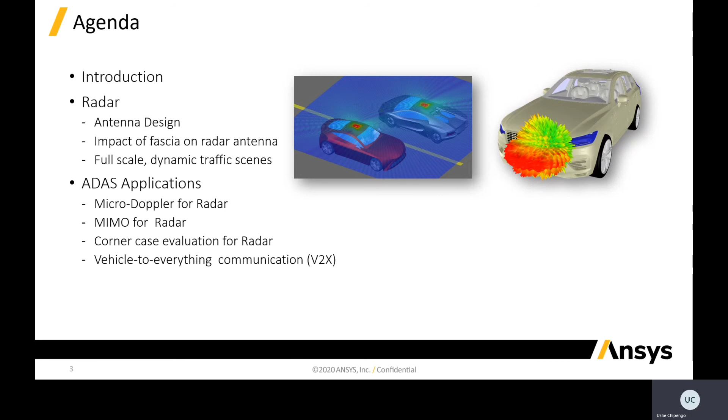In today's presentation, we will be showing how Ansys HFSS can be used in the design and optimization of automotive radar antennas. Using HFSS, we will demonstrate how we can evaluate the impact of packaging and electrically large platforms on the radiation performance of radar antennas. We will also show how full-scale dynamic traffic scenes can be created to obtain full physics synthetic radar returns for range, Doppler, and angle of arrival processing.

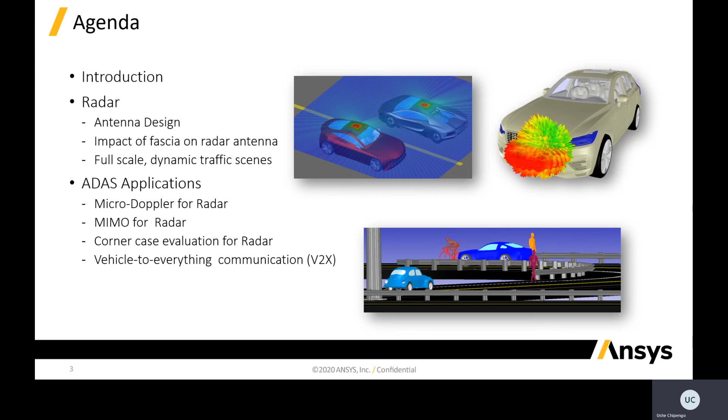Now, using this workflow as a foundation, we will show how HFSS can be used for Micro-Doppler and direction of arrival analysis using MIMO antennas in automotive radar. We will demonstrate how using simulation, we can evaluate the response of automotive radar systems in corner cases. Finally, we will show how the above-mentioned workflow can also be adopted to test vehicle-to-everything or V2X communication links.

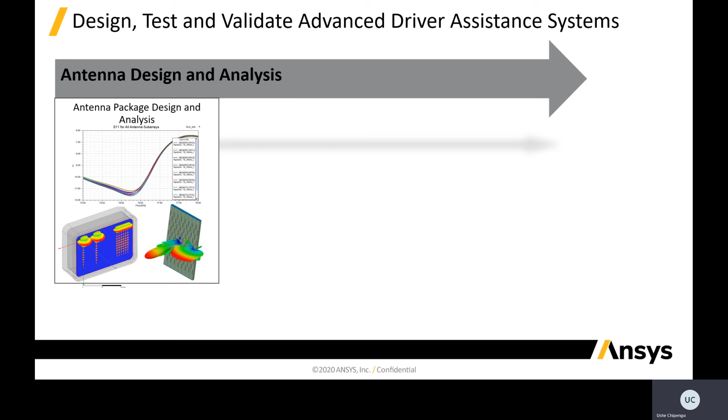As previously mentioned, the ADAS development workflow in HFSS can be broken down into three key stages. In the first stage, HFSS is used to design and optimize electromagnetic structures on a component level. This could be antenna design for automotive radar, smart remote keyless entry systems, V2X applications, among others. In the second stage, HFSS is used to evaluate how the package and platform where the component is mounted on can affect or modify its performance.

In relation to radar, for example, this involves evaluating the impact of a vehicle fascia or bumper on the radiation characteristics of the antenna. Finally, HFSS is used to evaluate the performance of these packaged and mounted components in driving scenarios. For example, this could involve obtaining synthetic radar returns or simulating the antenna-to-antenna coupling in V2X communication links. The workflow described here rapidly scales up in electrical size as we move from one stage to another. So how does HFSS maintain accuracy and efficiency in such a workflow?

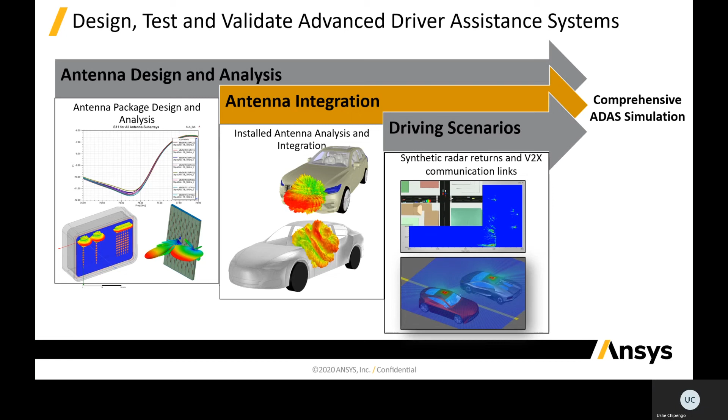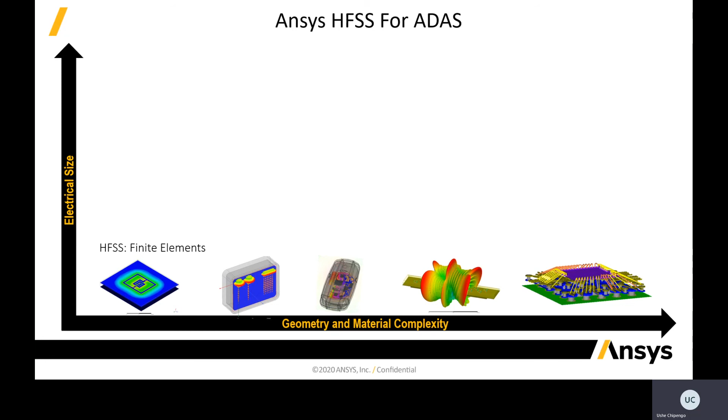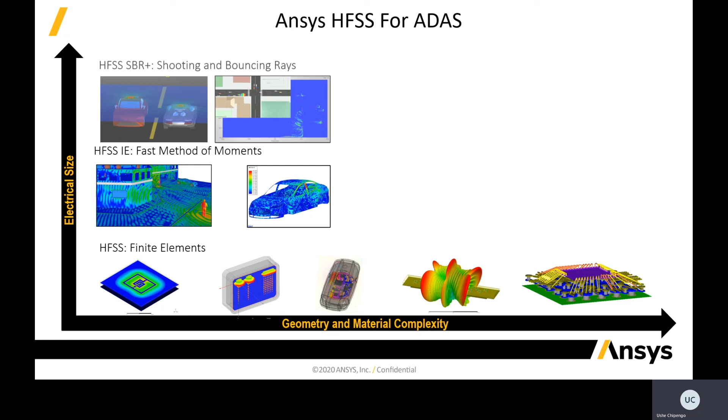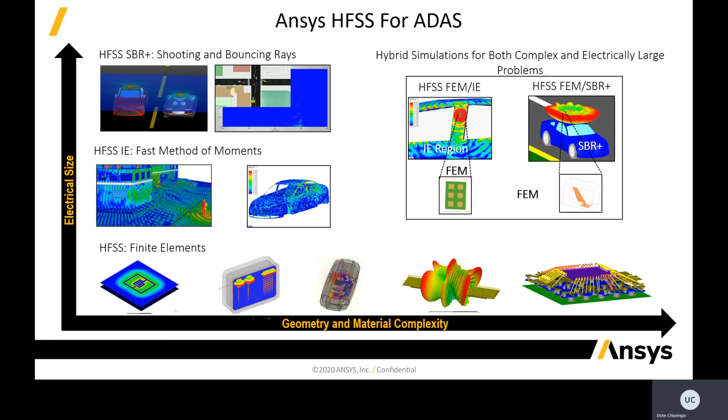On a component level, HFSS FEM is the unrivaled gold standard in accuracy for simulating electromagnetic problems with high geometry or material complexity. HFSS IE is a fast method of moment solver technology that allows for the efficient full-wave simulation of larger problems. For even larger problems, we can use HFSS SBR+, an asymptotic, full physics-based shooting and bouncing ray solver. Using hybrid simulations, all of these solver technologies can be brought together to solve both electrically large and complex problems. Now let's take a look at how these solvers in HFSS can be used for automotive radar.

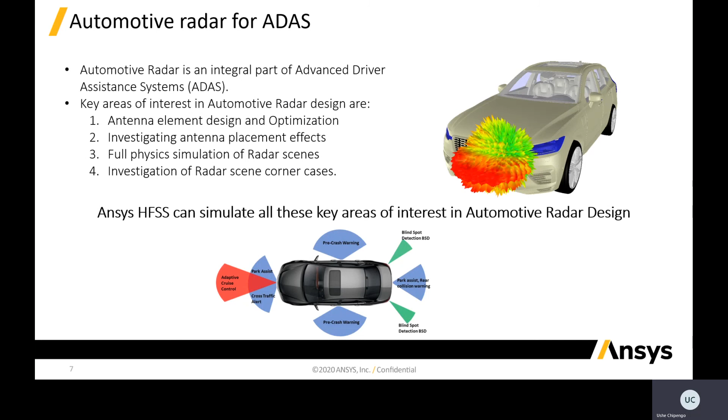Now, when it comes to automotive radar, we know that automotive radar is an integral part of advanced driver assistance systems. The key areas of interest in automotive radar design are antenna element design and optimization, investigating placement effects, full physics simulations of radar scenes, and investigation of radar corner cases. Now, Ansys can simulate all these key areas of interest in automotive radar. The first stage would be antenna design. Here we show how HFSS FEM can be used to design, in this case, a single 5-element tapered series-fed microstrip antenna array.

Using HFSS, we can determine the dimensions that we need in order for us to get resonance at the right frequency, and we can also determine the resulting radiation pattern.

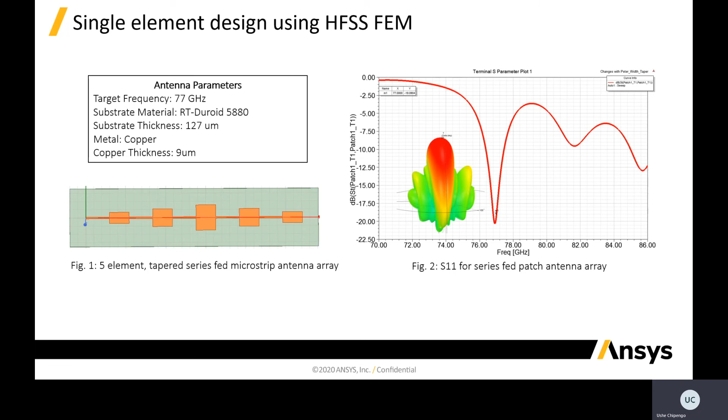To simulate even larger arrays, we can leverage the HFSS FEM 3D component domain decomposition method, DDM, for arrays. Here, we use a single element to create a 3D component. This 3D component can then be stacked along with other 3D components and used inside a much larger array.

In this case, an 8 by 12 element array is being simulated using the HFSS 3D component domain decomposition technology. This array is 24 lambda by 25 lambda. What we see is that this technology allows us to achieve fast, accurate, and efficient full-wave solutions for large arrays.

Here are some of the results that we can obtain by simply using this 3D component DDM technology. For this antenna, which has a total of 20 excitations, the simulation took around an hour and 5 minutes with only 16 cores. And we must note that this is for all 20 excitations being solved simultaneously.

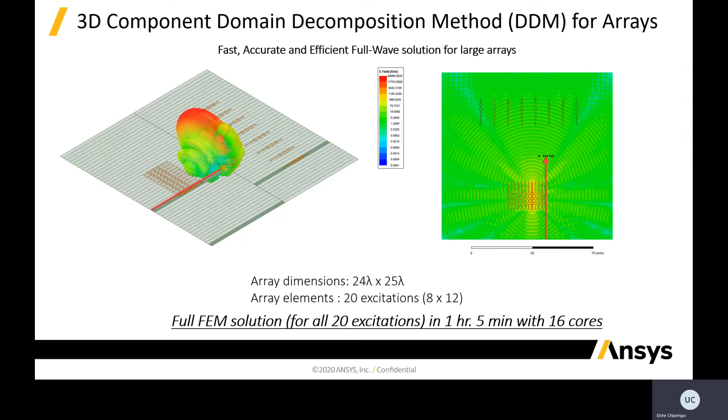Having designed and optimized the antenna, the next step is integrating the antenna on a platform. For this stage, we begin with the vehicle model where the antenna will be placed. Now, assuming that this antenna is going to be placed on the fascia behind the emblem, we can then take this particular component and simulate this inside HFSS FEM.

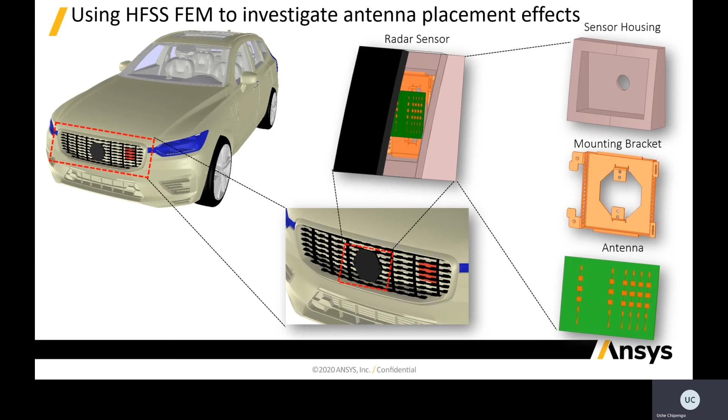In this situation, we have the radar sensor mounted inside a housing on a mounting bracket behind the emblem, which serves as the dielectric radome. The antenna housing packaging and the radome on the vehicle fascia can change the radiation characteristics of this antenna.

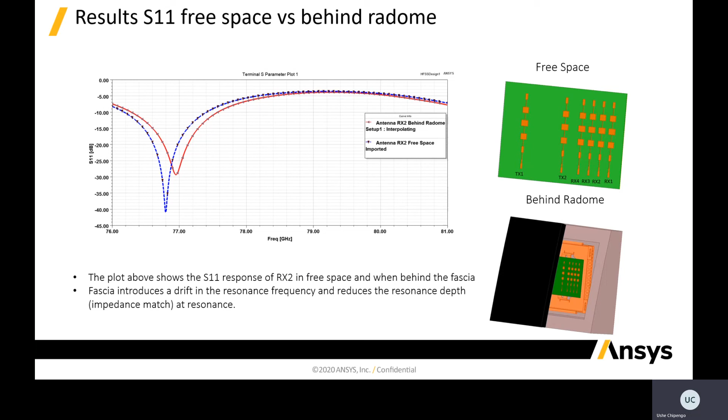And using HFSS FEM, we can simulate and observe how the housing and the fascia can lead to drift in the resonant frequency of the antenna, as shown here by the S11 plots that were obtained using HFSS FEM.

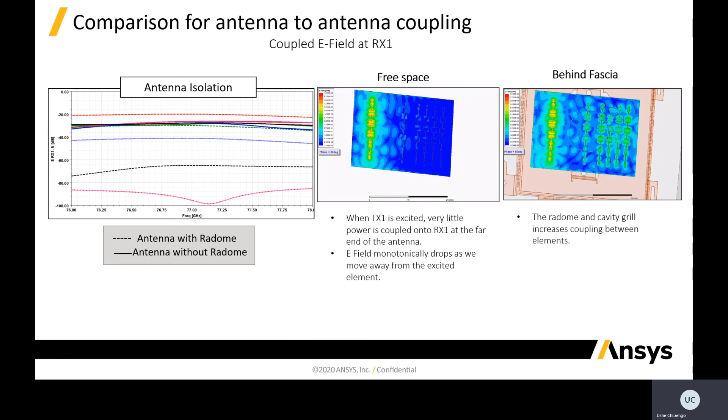Another study that we can conduct is to look at how placing this antenna on a platform can cause changes in the antenna isolation that we would have if the antenna is in free space. For example, in the first case in free space, when one antenna is excited, very little power is coupled onto the other receivers. However, placing the antenna inside the housing and placing a radome on top creates a resonant cavity that leads to poor isolation between the antennas inside the radar sensor, and this can degrade radar sensor performance.

So in summary, we were discussing how HFSS FEM can be used to design an antenna and evaluate its performance in free space. We can also take that antenna, mount it on a platform, and place it behind a radome and conduct a full-wave solution using HFSS FEM.

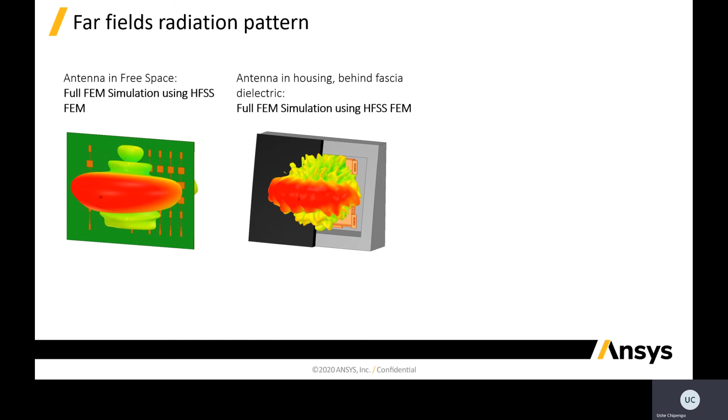In order to solve the even larger problem of the antenna being mounted on a full vehicle, we can use hybrid techniques such as HFSS FEM and SBR Plus being used in conjunction, or HFSS FEM and HFSS IE being used at the same time.

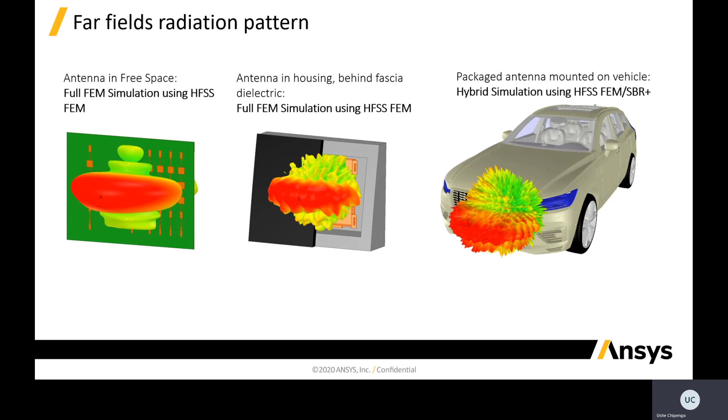Having determined this, we can go to the next level where we want to test the radar sensor in a full-scale traffic scene. In order to do this, we use the HFSS SBR Plus technology. Now, HFSS SBR Plus is an asymptotic full physics-based shooting and bouncing ray solver with complementary capabilities to HFSS FEM. This solver can efficiently solve electrically large problems.

HFSS SBR Plus uses geometrical optics to launch rays from a radiation source. These launched GO rays are vector field weighted by the radiation pattern of the current distribution of the source antenna.

HFSS SBR Plus then uses physical optics to paint currents wherever GO rays hit a geometry. Physical theory of diffraction wedge corrections and uniform theory of diffraction UTD rays are used to account for additional phenomenology due to truncation of PO currents at sharp discontinuities. Finally, HFSS SBR Plus also corrects the PO current truncation at shadow boundaries by including creeping wave physics. Therefore, using GO, PO, UTD, PTD, and creeping waves, full physics-based synthetic radar returns can be obtained.

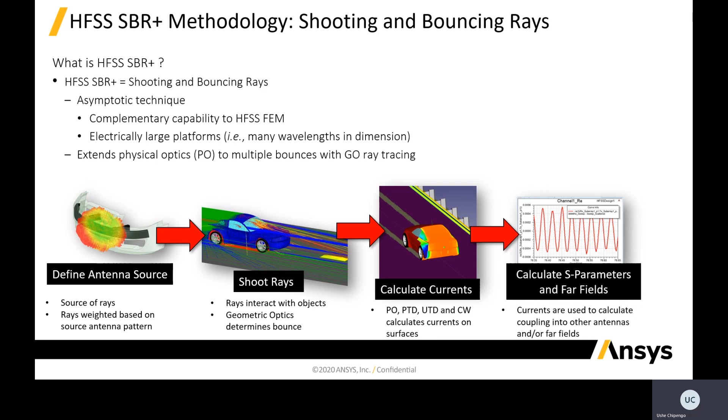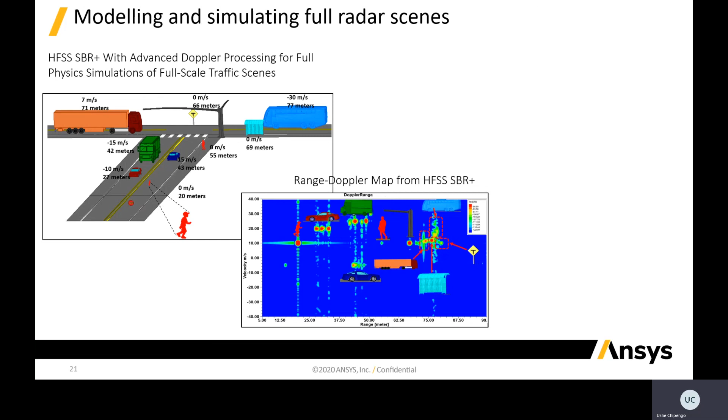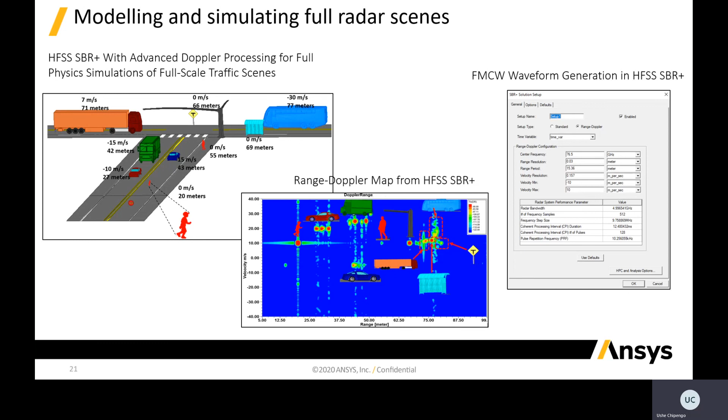In this case, we're demonstrating how HFSS SBR Plus can be used to create a full-scale radar scene. Now, I must note that all the actors that we see in this scene are the physical size that we would observe in real life, and this scene is simulated at 77 gigahertz. HFSS SBR Plus allows us to be able to create waveforms such as this FMCW waveform that can be used for typical radar simulation.

Here, we are observing how HFSS SBR Plus can be used in conjunction with the VRX driving simulator to model the driving performance in a realistic scene. What we're seeing here is that the ego vehicle, that is the red vehicle, can sense the environment around it using a full physics approach. We're seeing how there's some radar returns that are distributed over the entire scene, and this is different from what you would observe if you're not using a full physics approach.

Of even greater interest is notice how the pedestrian passing over the vehicle is showing some micro-Doppler effects. We can also see these micro-Doppler effects from other vehicles that are coming towards this ego vehicle because they have that scintillation of the radar returns.

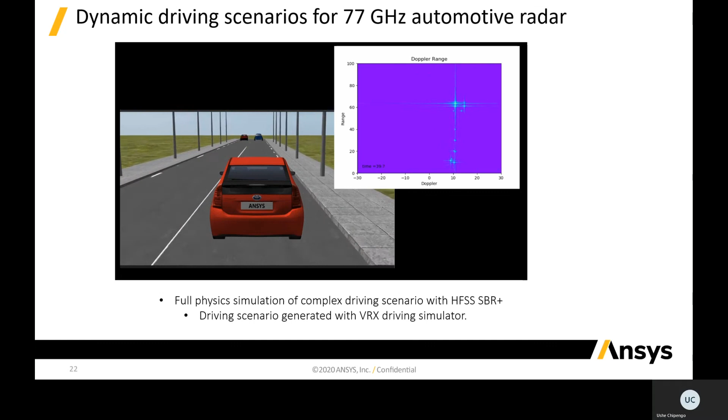To further investigate this micro-Doppler, let's look at why micro-Doppler is important. As vehicles are migrating from level 0 to level 5 autonomy, radar will need to detect and classify targets. Now, using this micro-Doppler response of targets, we can obtain more information about the micro-motion characteristics of a target and not just the velocity of the bulk platform. Now, full physics simulation can capture this distributed nature of this target and the micro-motion induced Doppler shifts.

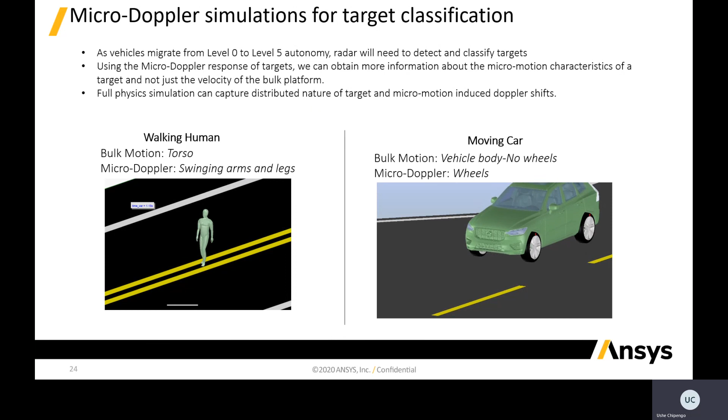In the first case, we have the bulk motion being attributed to the torso, and the micro-Doppler is being introduced by the swinging arms and legs. In the second case, the bulk motion can be attributed to the vehicle, and the micro-Doppler is being introduced by the wheels.

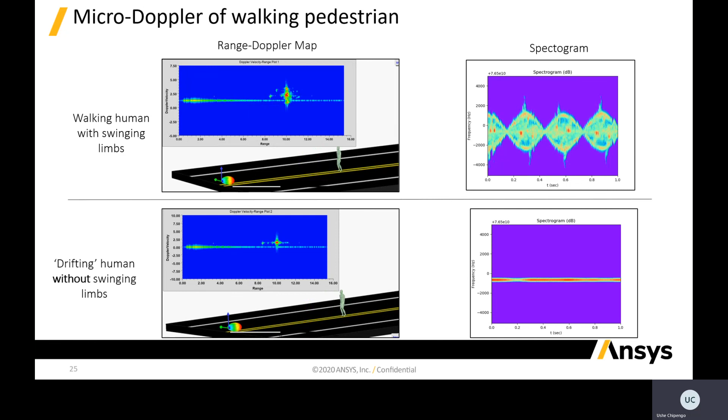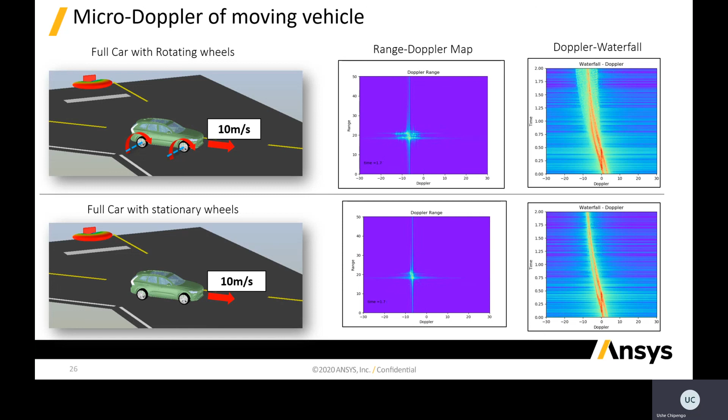Furthermore, we can even post-process these results and get the spectrogram. And looking at these two spectrograms, we see how by conducting spectrogram analysis, a radar sensor can actually detect the presence of a pedestrian. We can do the exact same case for a car, where we can see that the presence of micro-Doppler induced by the wheels leads to a spread in the Doppler waterfall plot that we are observing here. All these results were obtained by conducting post-processing of the full physics synthetic radar returns that we observe from HFSS SBR+.

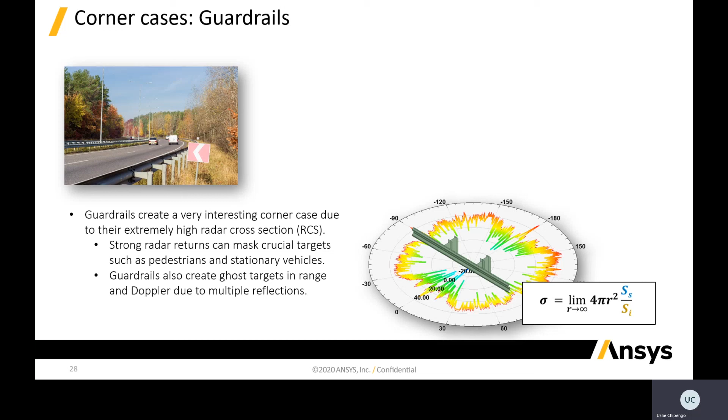HFSS SBR+ can also be used to investigate the performance of radar scenes in corner cases. A very popular corner case that can be debilitating for radar sensors is guardrails. Guardrails have a very large radar cross-section that can serve to blind and possibly even confuse a radar sensor. How do they do this? Well, guardrails provide very strong radar returns to the ego vehicle that can mask the presence of crucial targets. Furthermore, they present themselves as ghost targets that can further confuse the radar sensor.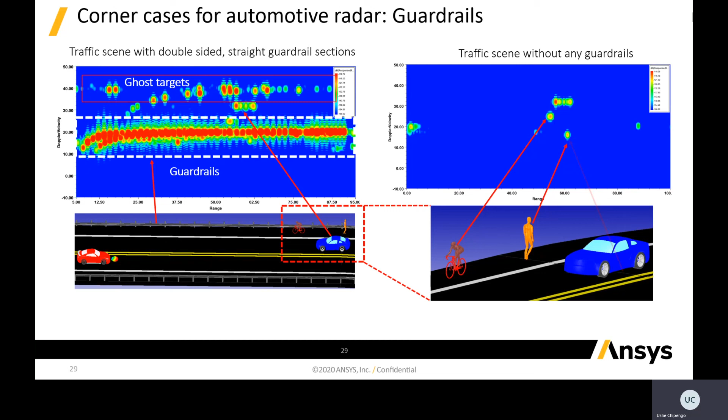Here we're seeing how this vehicle and a pedestrian and a cyclist can somewhat be hidden completely by the presence of these guardrails. And so because of this, by using HFSS SBR+, we can investigate and look at full dynamic driving scenarios and see what the radar sensor will be seeing. And in this case, we can observe how the guardrails are presenting themselves as this cloud of strong radar returns that hide the presence of crucial targets while also introducing ghost targets.

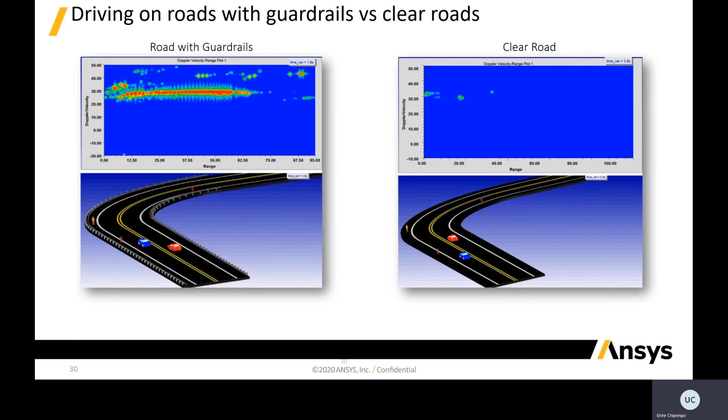HFSS SBR+ can also be used to design even more complex radar sensors, such as the ones used for MIMO, for angle of arrival. In high density areas where we have a lot of pedestrians and vehicles, fully autonomous vehicles will need to be able to separate targets in angle. This means that in addition to having high range resolution, they will also need to have high angular resolution.

To do this, we use MIMO antennas, since they're an efficient use of the hardware, because a single input and multiple output sensor is not an efficient way to use the filters, mixers, and analog to digital converters inside the radar sensors.

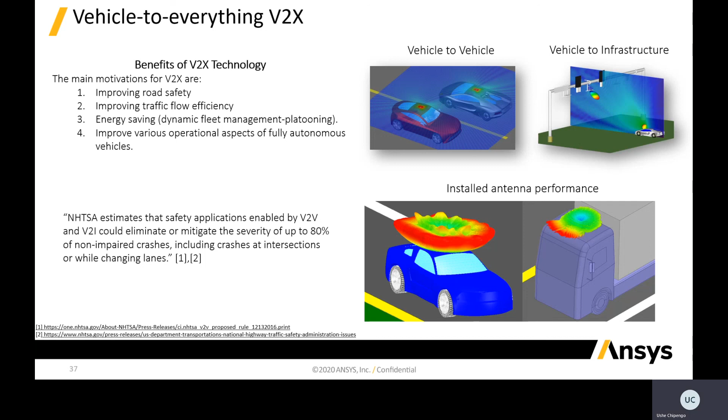Now, the benefits of vehicle-to-everything technology are well known. They include improving road safety. In fact, NHTSA estimates that safety applications enabled by V2V and V2I could eliminate or mitigate the severity of up to 80% of non-impaired crashes. V2X will improve traffic flow efficiency with energy savings, and finally improve the various operational aspects of fully autonomous vehicles.

Using Ansys HFSS SBR+, we can even investigate the impact of dynamic obstacles on a V2V communication link quality. Here we're seeing how the introduction of this vehicle leads to a degradation in the communication link between these two vehicles, causing an outage while this truck is between them.

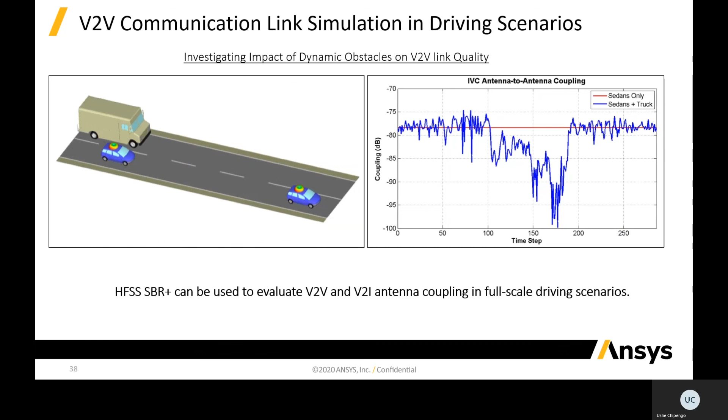We can even compare the accuracy of HFSS SBR+ for these electrically large problems. We can compare these results with measurements. Here, we replicated a measurement that was done for two vehicles approaching and departing from each other to see if HFSS could predict the received signal strength.

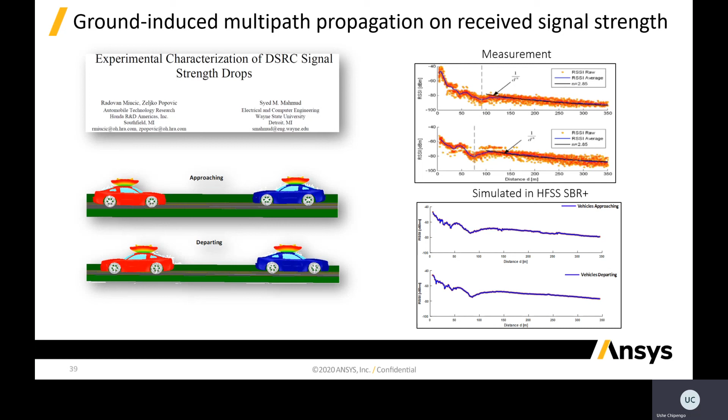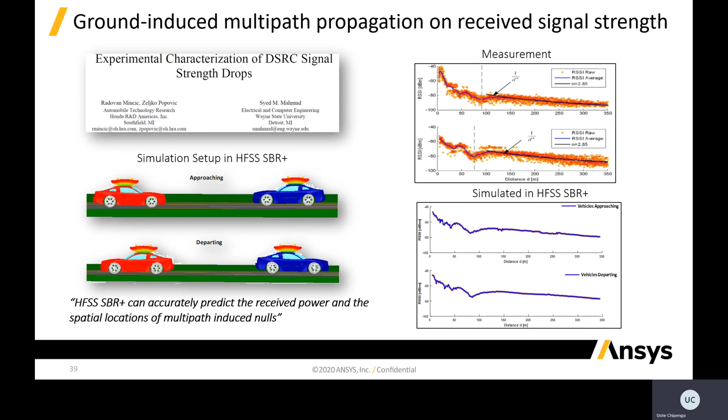What we see is HFSS not only predicts the received signal strength, but it can also show and predict the points where we observe the characteristic drop in the signal that results from multipath propagation. So what we see here is that HFSS SBR+ can accurately predict the received power and the spatial locations of multipath induced nulls.

Now, in summary, what have we talked about today? Well, we have discussed how Ansys offers a comprehensive solution for ADAS applications. We have demonstrated how multiple solver technologies available in AEDT enable efficient, fast, and accurate solutions to be applied to electrically large and complex electromagnetic problems. We have shown how Ansys Electronics Desktop AEDT can be used to design antennas with HFSS FEM and to evaluate the impact of antenna platforms on the performance of those antennas.

Ansys Electronics Desktop can be used to accurately predict the coupled power between two antennas for V2X applications. Finally, AEDT can be used to accurately capture the scattered fields in a full-scale traffic scene at 77 GHz for automotive radar applications. Micro-Doppler, corner cases, and MIMO AOA were some of these applications.